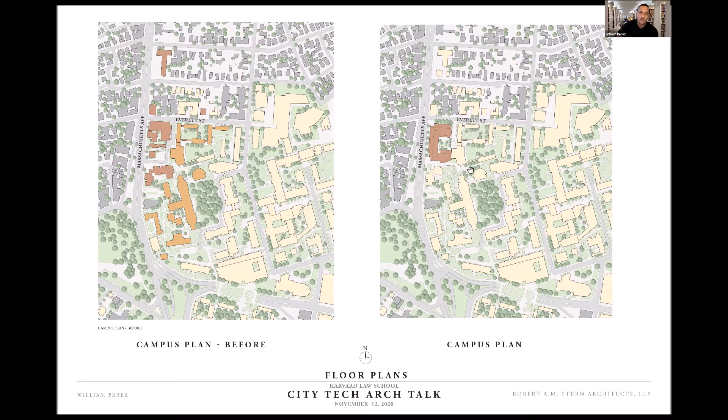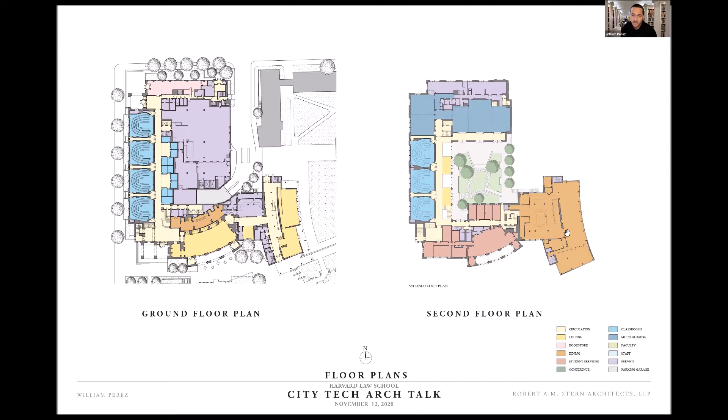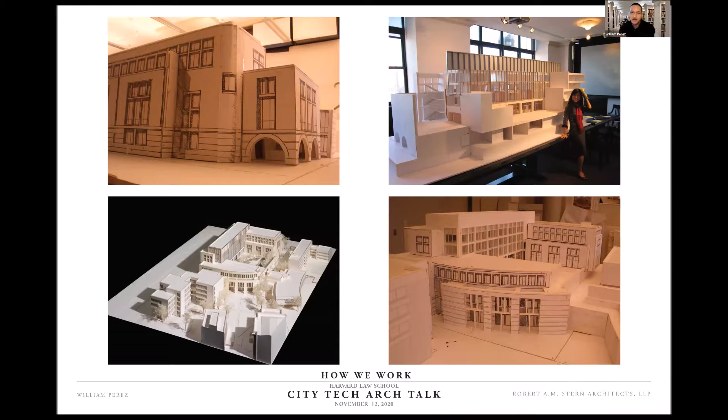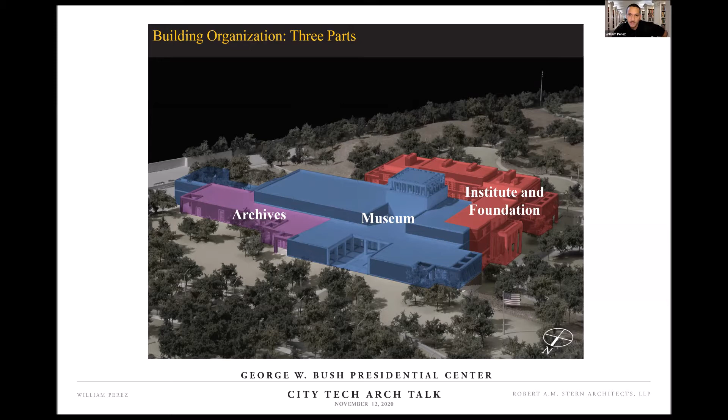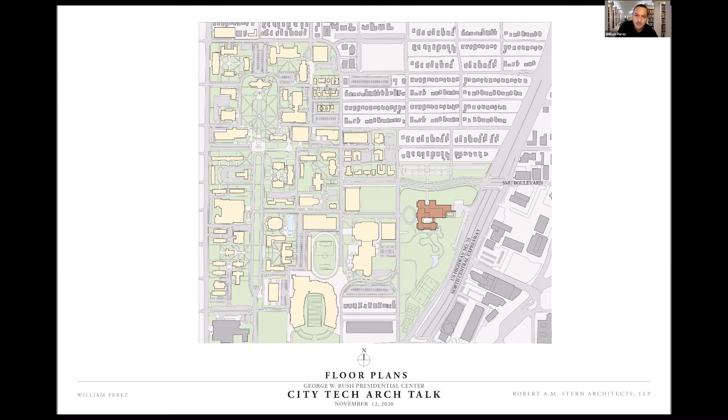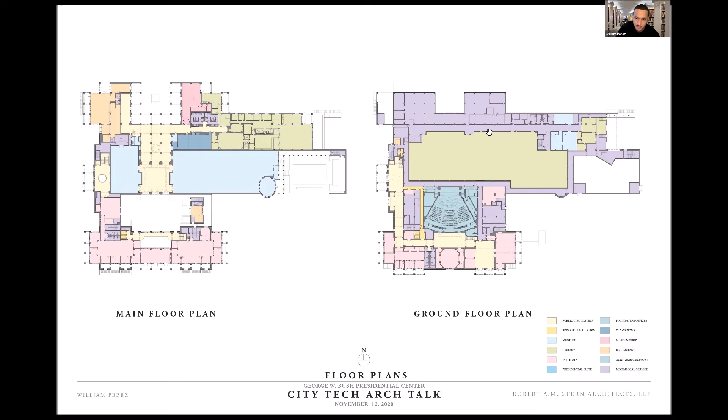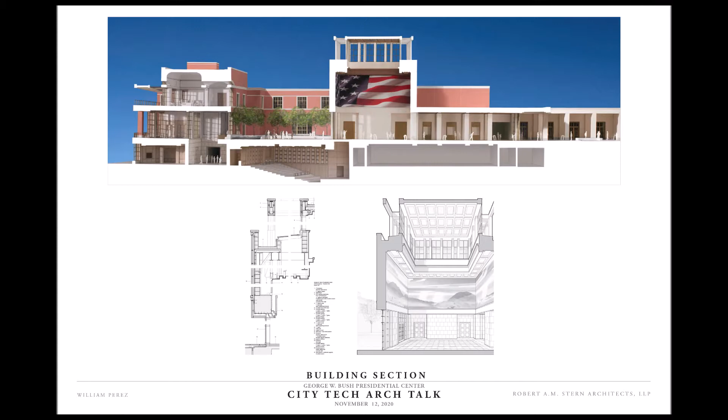All right, any questions on the presidential library?

Oh, well William, I had a question about the library. I'm not sure, but could you say something about how RAMSA got the commission for this library? Was it a competition, or were you just selected out of a hat?

I'm not 100% certain, but I think RAMSA was selected by George W. Bush. Dan, please, if you have any information, correct me, but I don't think RAMSA competed for this project. I'll double check - after lunch. They had a selection committee, and the committee basically put together a list of people they were interested in, then called individually and spoke to people. So there was no competition, they just came to a decision. Very Washington-like, very presidential. Okay yeah, William, thank you for that, Dan. Thank you, Dan.

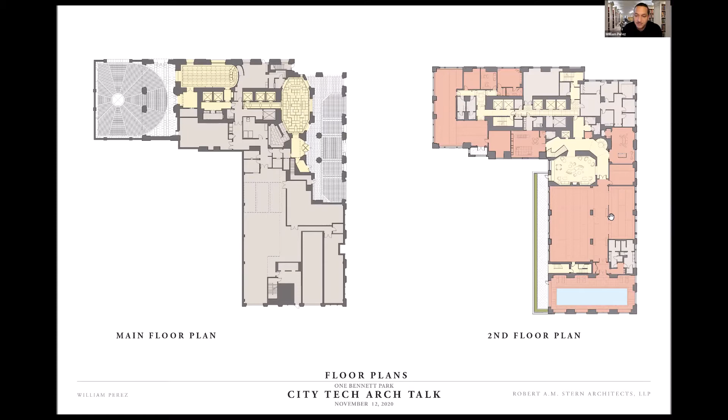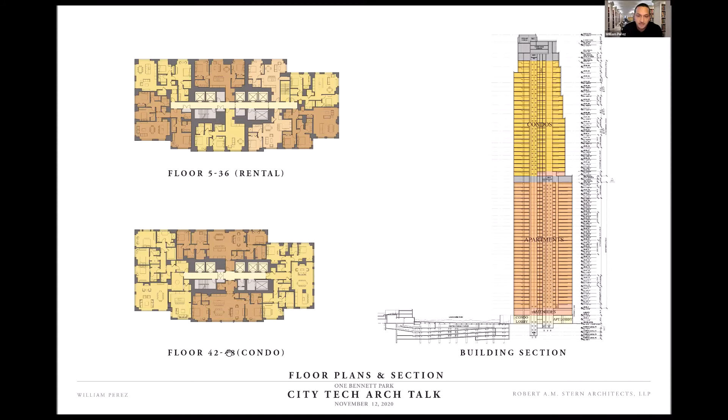It's easy to cut and manipulate. Bob himself gets a knife and cuts it, and makes us take pictures, and we develop ideas from having a 30-minute session with him, Dan, and other co-workers working with clay.

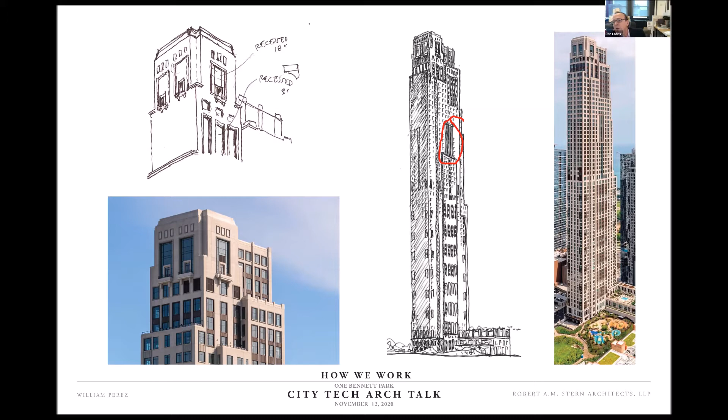So there are large living rooms behind that element, but there are other places in the building with similar rooms that aren't quite so glassy. On a residential building, we think that kind of play is essential to make it feel not monotonous and completely repetitive.

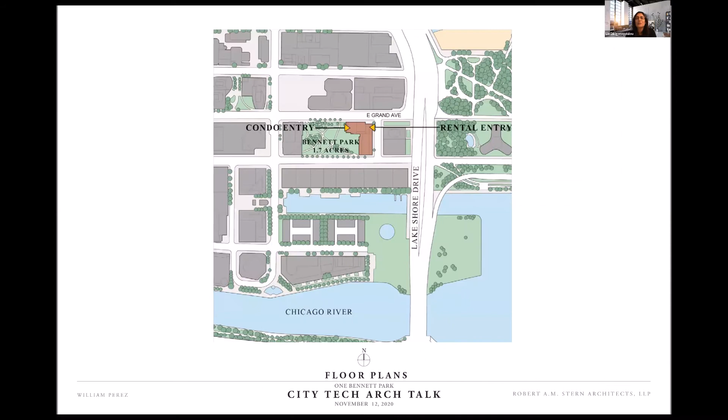Now, how many stories is it? It's 6 to 7 stories... actually, I should go back to the first—it's 836 feet tall to the top of the bulkhead. I think it was the highest residential tower in Chicago when it was first built. Well, it still is.

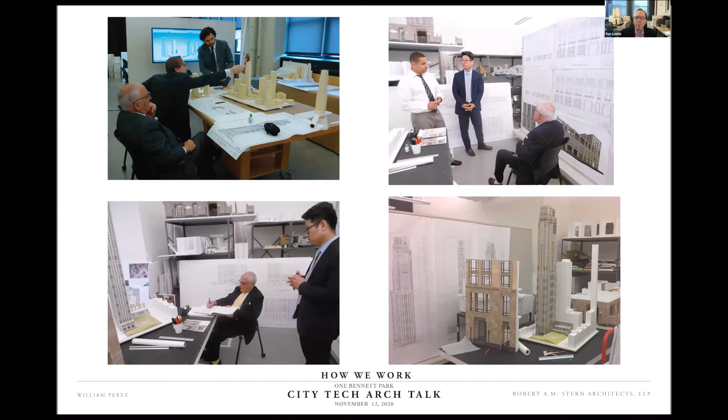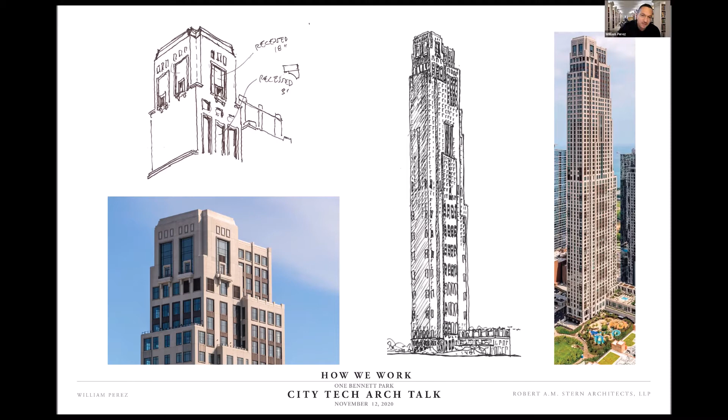So, One Bennett Park — sorry, 875 California, Crescent Nob Hill. The pandemic actually stopped construction; it's about to finish anytime now. I joined this team during mid schematic design. During those design phases, with my background building models, I was directing younger staff assisting with models for meetings with the partners and clients. Later in the phase, the current project manager left Ramsa — he happened to also be in California, San Francisco — so I was given the opportunity to manage the project. It was the first project I managed myself for Ramsa.

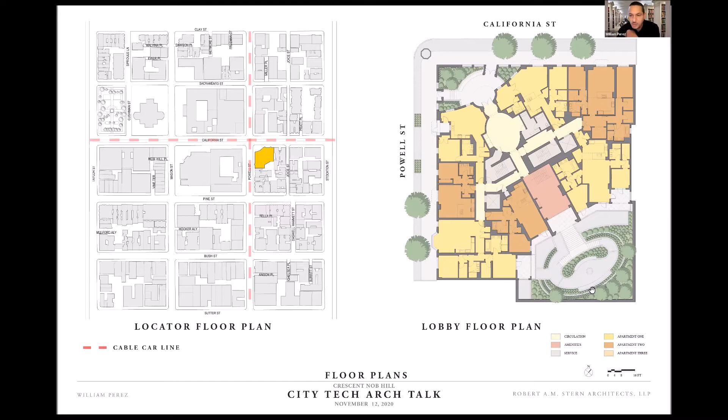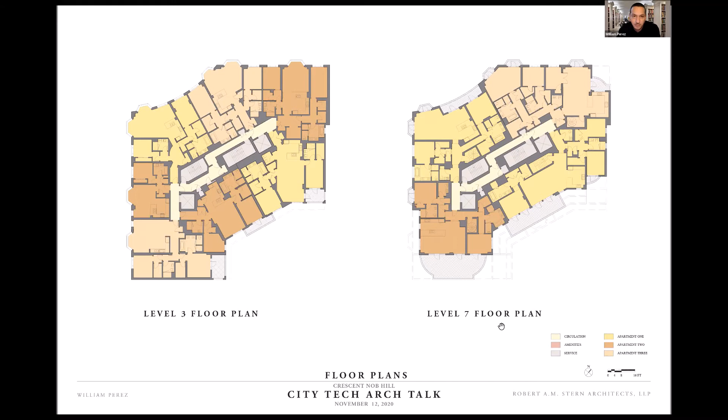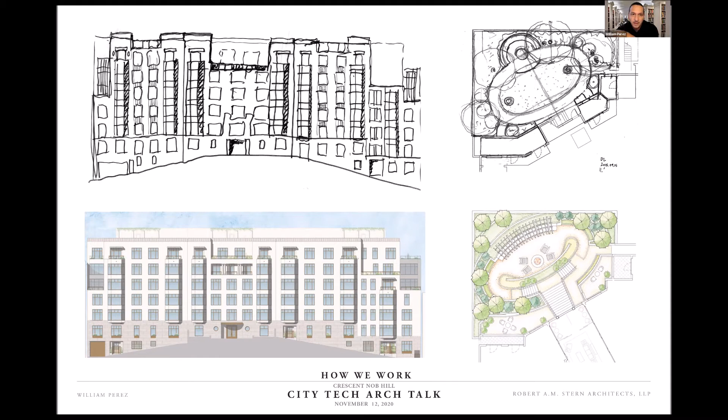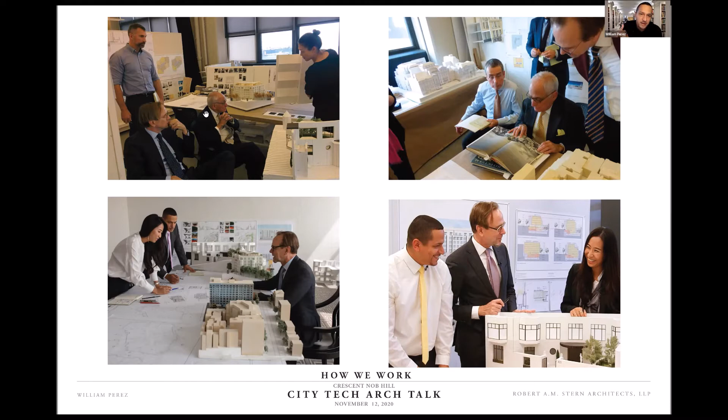So again, showing how we work in the office, you see Bob Stern on the upper left, taking a look at a facade detail, potential facade detail, full scale.

You see underneath us looking at different sketches of elevations, presenting to Dan. The lower right, as you by now get a sense of Dan, is his humble person. He likes to make us laugh, so it's not always serious work.

So we have a moment of joy at the lower right image. I'm showing a picture of Bob looking at books, because I did not emphasize this in the presentation, but we do a heavy amount of research before we begin the project. Every project is unique, and every project is meant to be contextual. It wants to be—it's not like making a statement.

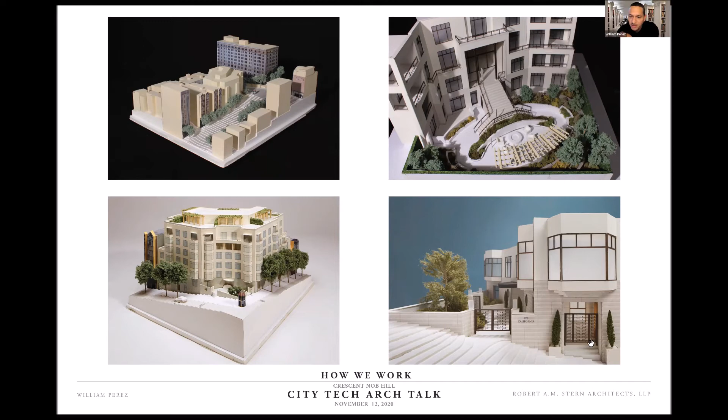Again, they look presentable now, but they begin as a rough model that we use—we break it, put it apart, use it as a tool. The upper right is a DD level model, again showing the secret garden, and studying the base and the masonry entries to some of the units.

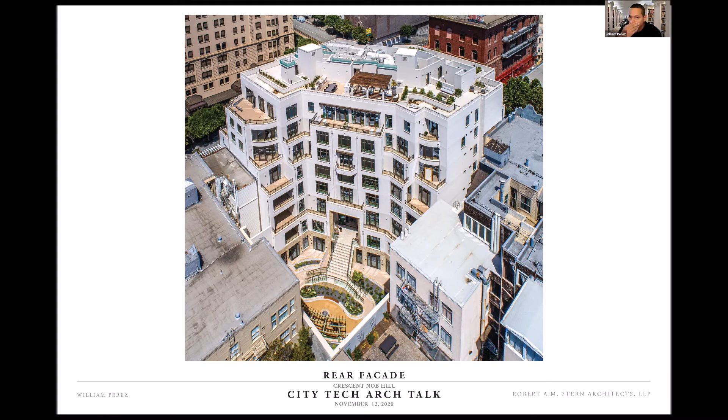If you remember the sketches, then the development of the sketches, and now you get a feel of the actual terrace.

Again, even in the rear garden, the same level of material quality was brought in. It's just that in the simplified version, it's not rusticated, but it's the same granite stone material.

These are views of the terraces. You get a feel of the terrace, and you see the level of detail of the scallop at the roof.

And here, as I mentioned earlier, the penthouses each of the 4 of them have their own terrace, but we also have an amenity terrace that everyone can take advantage of, along with a public roof terrace.

And here is a night view of 875 California, Crescent Nob Hill, as it stands right now.

I'm going to add, William's being very modest, but he took over as project manager for this project and led our effort for the entire second half, which included directing the final development of all the detailing and working out how those details were going to be put together, coordinating with the architect of record and all the consultants and the contractor, reviewing the contractor's work and discussing how we could achieve all the details we were trying to achieve.